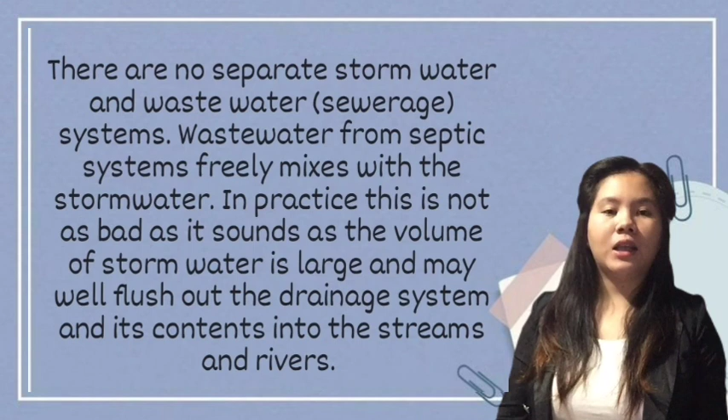In practice, this is not as bad as it sounds, as the volume of storm water is large and may well flush out the drainage system, and its contents into the streams and rivers.

So the installation and maintenance of drainage systems, along with roads and water systems, is one of the major responsibilities of local government.

So this is a new sewer drainage system in Villa, Iloilo City. It drains directly into the Batiano River.

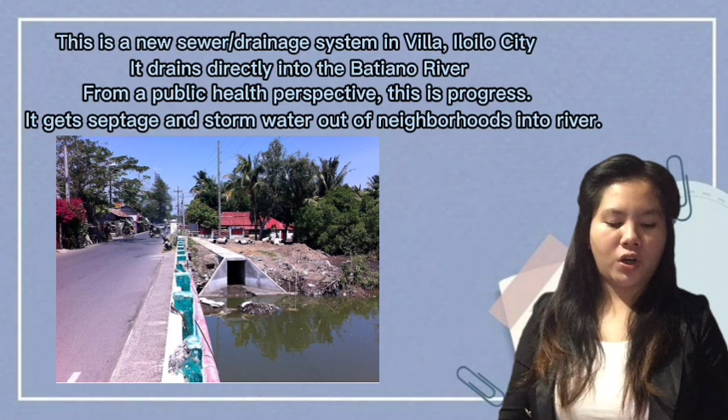From a public health perspective, this is progress. It gets septage and storm water out of neighborhoods and into the river.

So the systems are not necessarily centralized. The idea is to get wastewater to a nearby ditch, stream, or river.

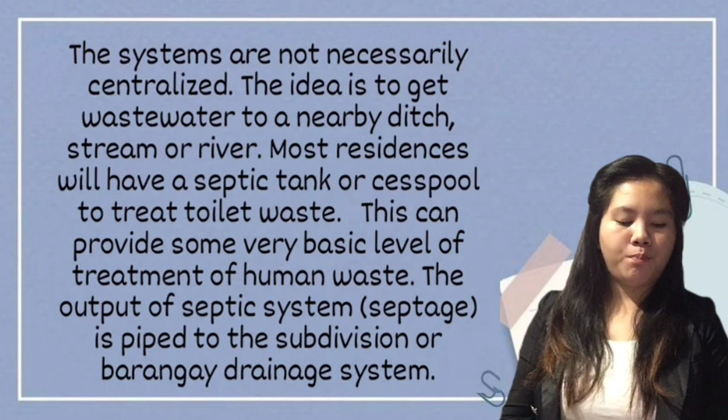So most residences will have a septic tank or cesspool to treat toilet waste. This can provide some very basic level of treatment of human waste. The output of the septic system, or the septage, is piped to the subdivision or barangay drainage system.

Greywater, or wastewater from sinks, showers, and washing is generally discharged untreated into the drainage system. Sometimes the drainage system is more or less underground, and sometimes it is open concrete ditches. This can be smelly, but cheaper and easier to keep clear than covered drainage systems.

In many places, the drainage system is under the sidewalks, consisting of concrete slabs covering the drainage channel. Sometimes these are broken, so walk carefully or you might plunge a few feet into the malodorous mess.

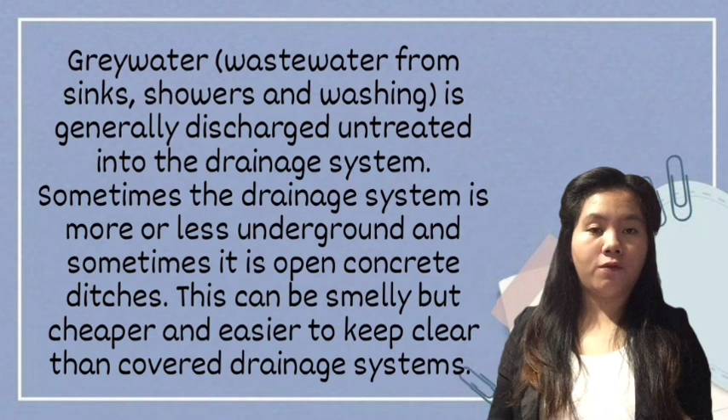So there is no further treatment of the waste before it plunges into the nearest stream. Next is the sewage treatment.

Sewage systems collect wastewater and treat it before discharging it back into the environment. These systems consist of intricate networks of underground conduits or sewers that convey the sewage through the treatment process to the point of disposal.

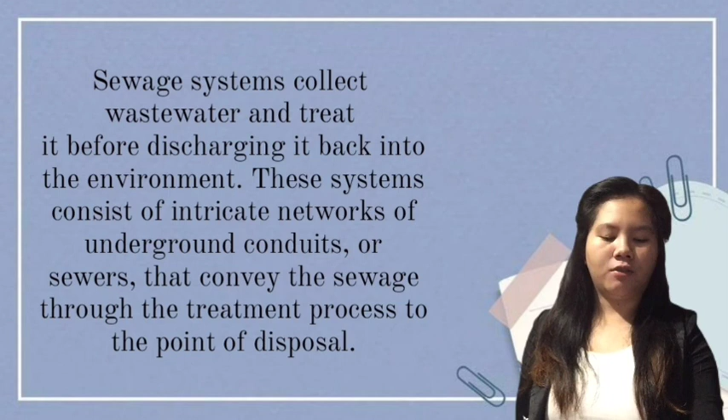Sewage systems also handle the flow of rainwater, either separately or as part of a single system. Separate systems are generally preferable, because in single systems, heavy rainfall can overload treatment plants, with the result that untreated overflow can become a source of pollution.

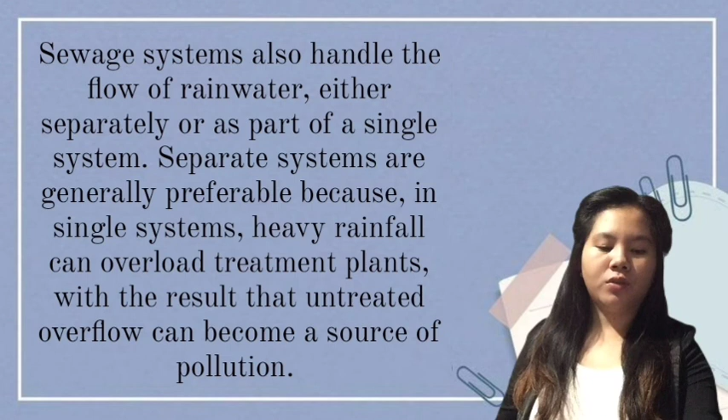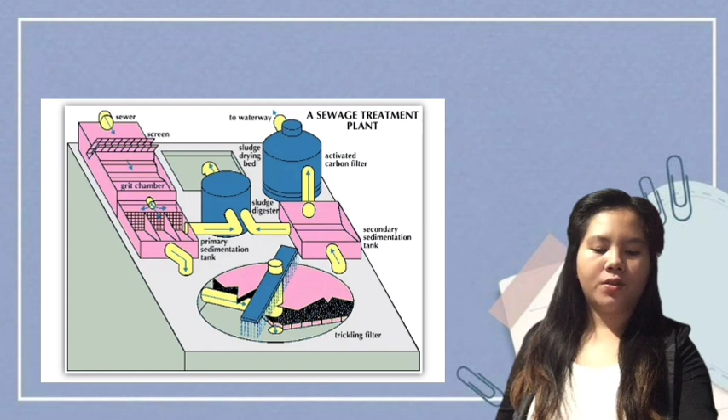In separate systems, rainwater is often allowed to flow into streams untreated because it is assumed to be relatively clean. Sewage is processed in three major steps, called primary, secondary, and tertiary treatments.

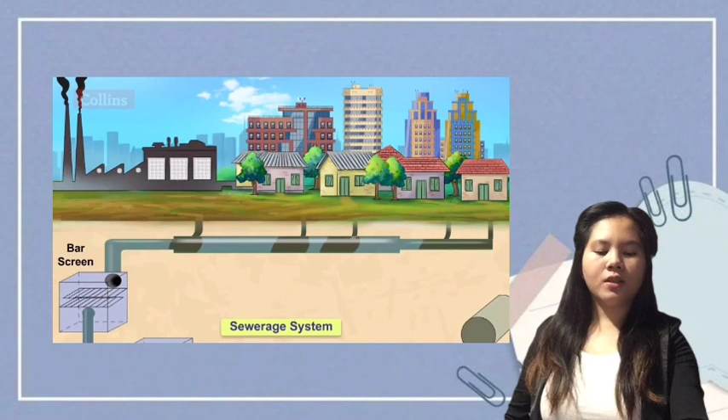Most areas do not use all three, and different areas use the treatments in different ways. First is the primary treatment.

The initial, and sometimes the only, method of cleaning wastewater is primary treatment, which consists of removing floating chunks and fine particles of solid waste.

The simplest form of primary treatment is a cesspool, now found primarily in rural areas. A cesspool is a big tank with a porous bottom and sides that lets the liquid wastewater filter into the ground while holding the solid waste.

Periodically, the tank must be cleaned. The solid matter, called sludge, is sometimes used for fertilizer or landfill.

Septic systems are somewhat similar, though the tank is connected to a drainage field so that more waste can be dispersed over a wider area.

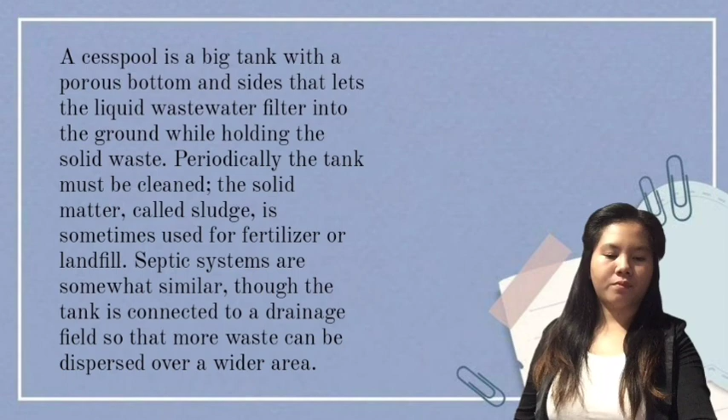In the primary treatment process, the sewage flows through the grit chamber very slowly, so that the sand, pebbles and soil settle down at the bottom.

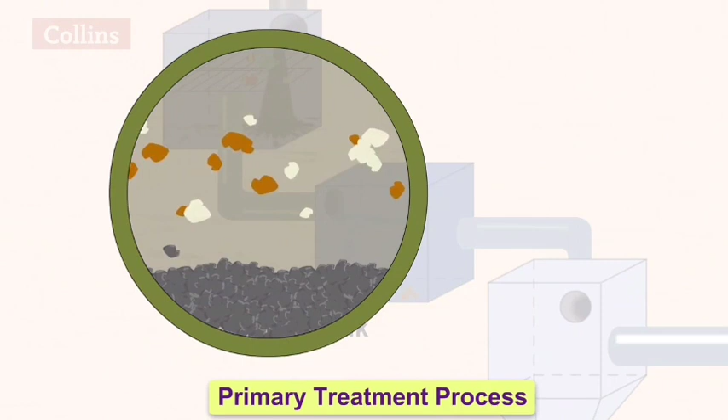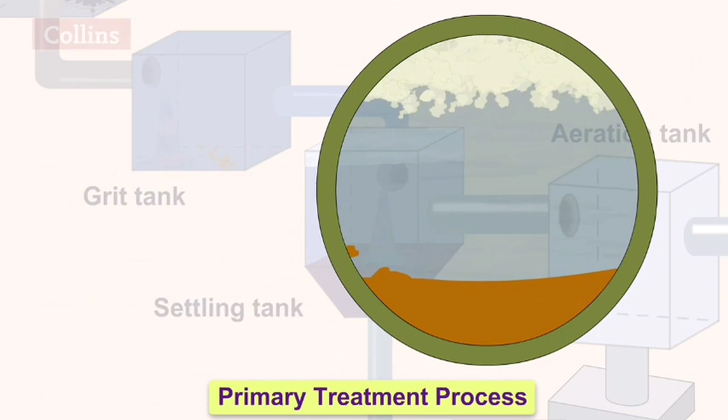The sewage flows into the settling tank or sedimentation tank, where solid wastes like feces are allowed to settle down, while wastes such as soaps, oils and grease rise to the top of the wastewater. The waste material that settles down at the bottom is called the sludge, and the floatable material is called the scum.

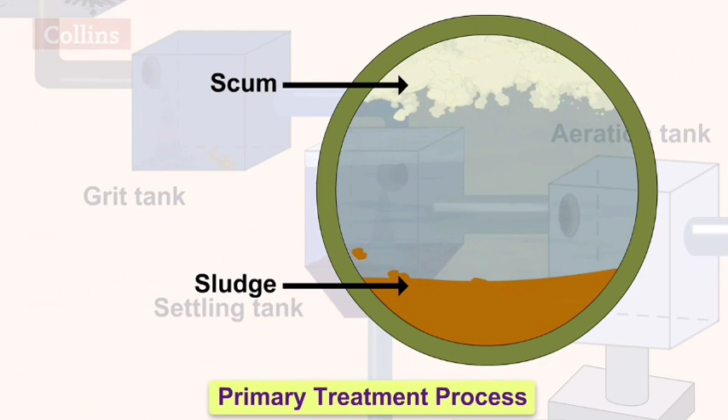Scum is then removed using a skimmer, and sludge is removed with a scraper every few days. The water that is left is called the clarified water.

Next is the secondary treatment. Today, large cities are usually required to put their wastes through both primary and secondary treatment, because primary alone removes so little organic material. So secondary treatment uses aerobic, or oxygen breathing, bacteria to decompose organic wastes.

The main object is to put the wastewater in contact with as many bacteria as possible while keeping it aerated, so that the bacteria have an adequate supply of dissolved oxygen. One of the most common secondary treatments of this type is the activated sludge method, so called because it uses sludge that is activated, or teeming with microorganisms.

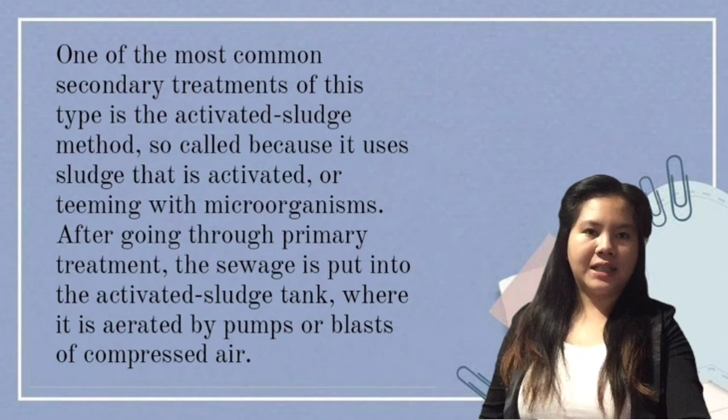After going through primary treatment, the sewage is input into the activated sludge tank, where it is aerated by pumps or blasts of compressed air. The compounds produced by the bacteria remain mostly suspended in the water and flow out with it into a secondary sedimentation tank.

Lastly is the tertiary treatment. Wastewater that has received primary and secondary treatment still contains dissolved materials, which make it unsuitable for almost all uses except irrigation. In the secondary treatment process, biological or organic wastes are removed.

It is a biological process. This is done by transferring the clarified water into an aeration tank, where air blowers bubble air, which helps the aerobic bacteria grow and feed on organic contaminants such as food waste, feces, and other organisms.

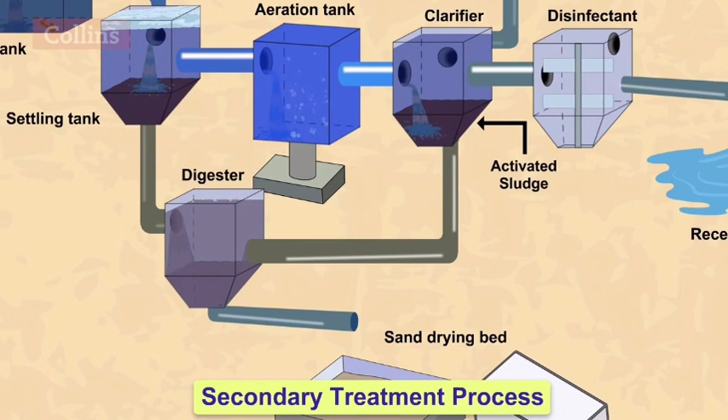The mixture then flows from the aeration tank into the clarifier, where activated sludge settles out by gravity. The activated sludge so produced, along with the sludge produced in the primary process, is transferred to the digester, where it is decomposed by anaerobic bacteria.

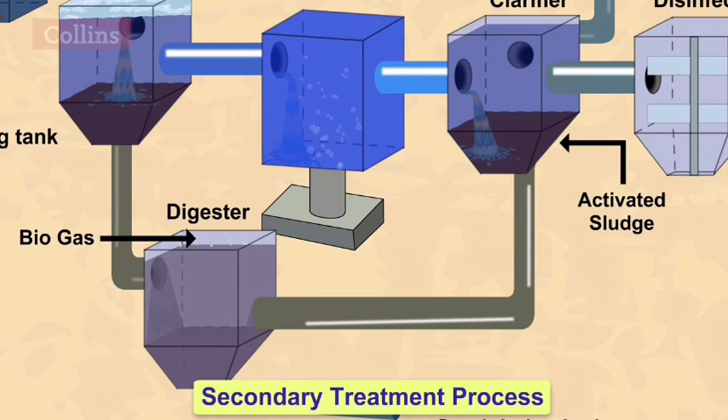Biogas is produced in this process, which can be used as fuel or to produce electricity. The activated sludge is then left in the sand drying beds. Some quantity of water in the activated sludge evaporates, and the remaining quantity drains through the sand beds. This leaves behind the remaining dried sludge, which can be used for making fertilizers or compost.

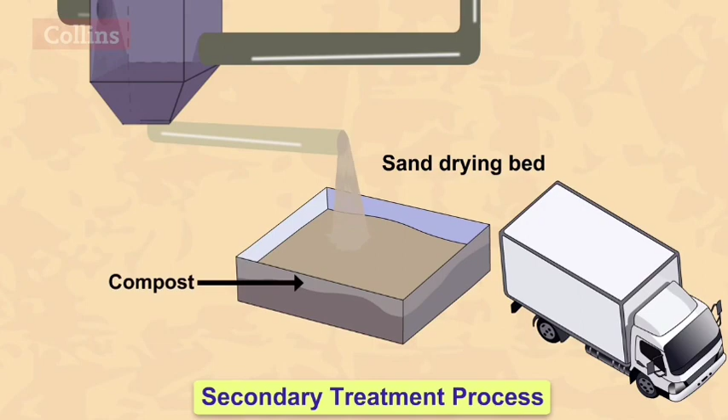Lastly is the tertiary treatment. Wastewater that has received primary and secondary treatment still contains dissolved materials that make it unsuitable for almost all uses except irrigation. So tertiary treatments, which depend largely on artificial chemical processes, are designed to remove these materials in order to make the effluent safer to discharge into waterways and safer for industry to use.

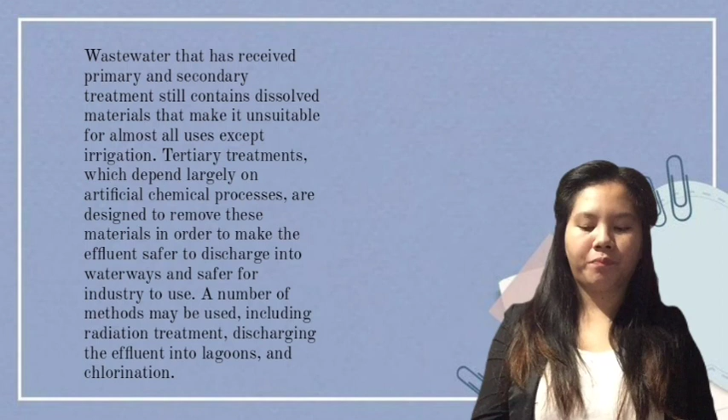A number of methods may be used, including radiation treatment, discharging the effluent into lagoons, and chlorination. Sewage may also be passed through filters made of activated carbon, which consists of finely ground charcoal grains with rough, pitted surfaces that trap impurities.

Alternatively, sewage may be strained through a screen made of tiny seashells called diatomaceous earth.

The effluent may also be treated with chemicals that transform the dissolved organic material. Some chemical compounds, for example, combine with the nitrates in sewage to produce various salts. Such treatments are expensive, however, and are difficult to perform routinely.

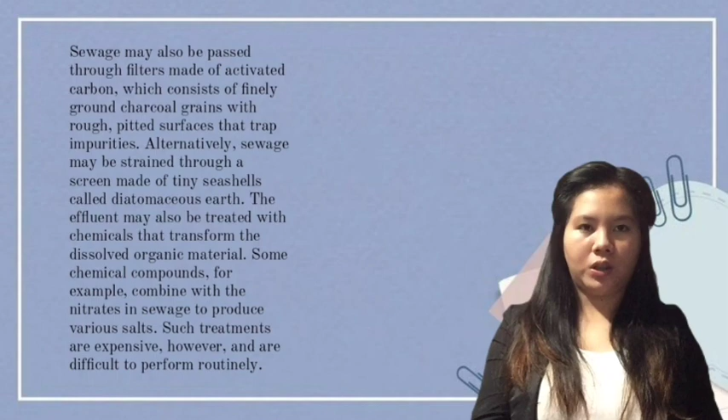In the tertiary treatment process, the leftover wastewater is treated with chlorine to remove phosphorus compounds, nitrogen compounds, and bacteria. It is a chemical process. Chlorine tablets are added to kill the germs. This process is called chlorination. Then this water is let off into the water.